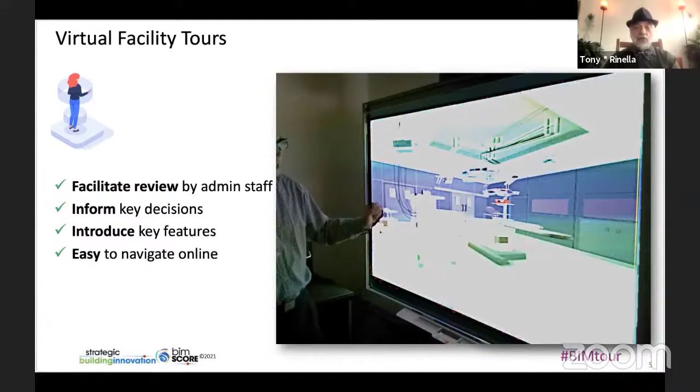Some of the things that people immediately think of are, oh, I can put on 3D glasses and I can see a wonderful walkthrough of my facility. And this is very useful to educate staff, to inform decisions. It can help us introduce key features of a facility to the people who will dwell in it, and also for our leasing efforts. But there are other things we can do as well.

Because the information is stored digitally and in a rational format, which is understandable by many systems, we can do all sorts of analysis to optimize the value we receive from these facilities. And those can be in terms of making sure that the facilities are comfortable, making sure that they're functional, making sure that we use the space well, and making sure that we support workers or residents who are inside the building.

We can also use these tools to help us with preventative and predictive maintenance so that we can understand what tasks need to be done to keep all the systems in the facility functioning well. We can also use this to track our requests for service, our trouble tickets, so that we can see an overall view of what's happening with our facility at any moment, and organize many facilities so that we can better manage the labor force.

We can also use it to help the people who are going to service the equipment, either for scheduled maintenance or to handle an emergency that arises, so that they can immediately, before they go into the situation, get a visualization of what the equipment looks like. They can see where it is in relation to other portions of the building, and they can use their handheld tools or some other visualization to quickly get all the information they need about the piece of equipment to help them service it more quickly.

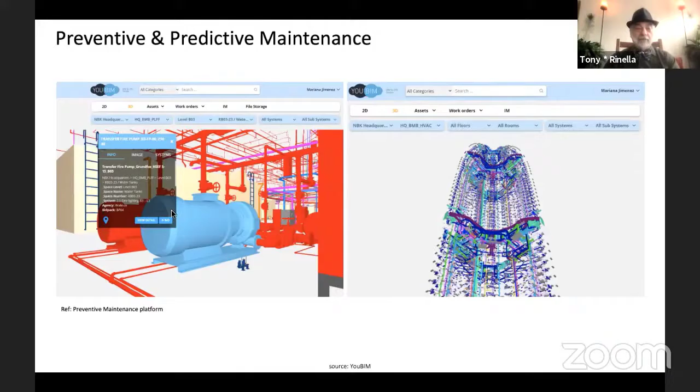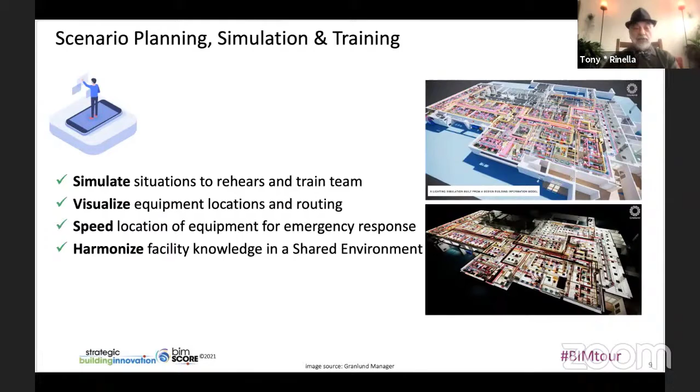It's also possible to do scenario planning and simulation. Scenarios can be as simple as, how do we show people how to exit a building in the case of an emergency? Or if we're doing renovations, how will we experience the building as the renovations take place and certain portions of the building are under construction.

We can also use these tools, the BIM tools connected with Internet of Things for our systems and services, to begin to understand how we're using energy, water, other resources, and not only see what we're doing in this moment, but based on analysis of the patterns of use, to be able to predict what we will need in the future.

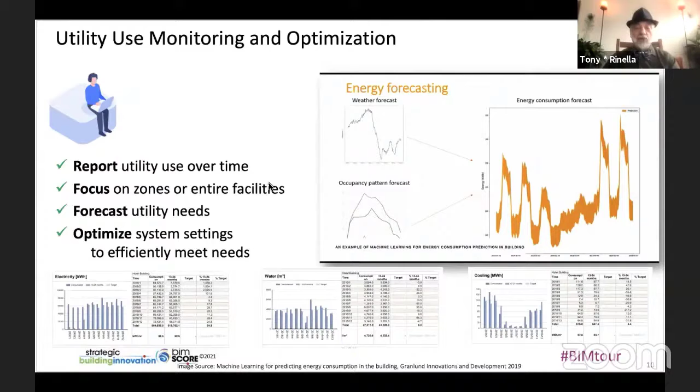This can be extremely useful, for example, if there are seasons of the year or parts of the day when we have a high cooling need, and we can understand how to purchase our energy or perhaps buffer and store our energy so that we can accommodate these spikes in need without having to go to more expensive resources. Also very useful for those who are concerned with green energy so that they can assure themselves that their storage capacity will meet their peak need.

Perhaps most importantly, these digital systems give us the ability to integrate reporting from all these various aspects so that at an executive level, we can get a very quick dashboard view and a look to see, is this building functioning the way we anticipated, the way we planned, the way we budgeted, or is something going better than expected or worse than expected, in which case we can take intervention.

So once we know all of these things, we can then begin to understand what our use cases will be. That is how we will use BIM. We can understand what information we will need to support these uses, and therefore what information needs to be in the asset information model, the BIM, and we can then inform the creation of that asset information model, the BIM.

This model can have many different kinds of information. It can have the geometry, so we know what things look like. It can have the data, so we know what things are. And it can have other related documents, for example, warranty information or maintenance information, so that we understand how to care for the systems in our building. And then anyone can get a quick report to get the highlights of this information, or they can look at more detailed documentation.

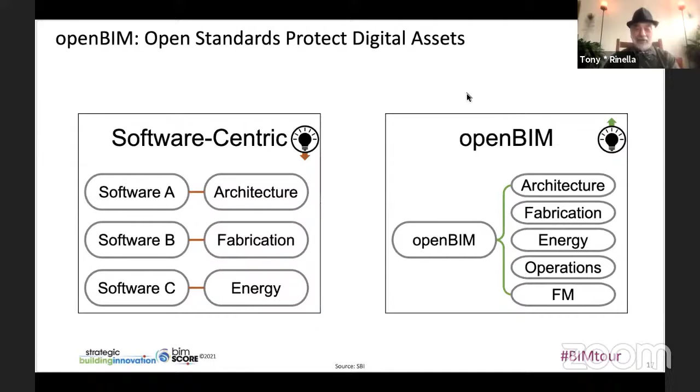Whereas if we use an open standard, such as openBIM, which you can find at buildingSMART International, then all of these different functions can speak the same language. Those of you who may be struggling with my English right now will have sympathy for how important it is to have all of our systems speak a common language.

Then we have to develop a plan to collect the data for the facility. It is very unlikely, especially for a large facility owner or an owner of many facilities, that they can, in one moment, gather all the information they need. It's important to do planning and follow that with implementation. The planning will look at the business requirements, such as those we've just spoken of. They'll want to develop a vision with objectives, that is, what will they accomplish, and targeting, which is what is the measure of success.

If, for example, we say that we want to occupy our buildings, that's a good objective, but we need to measure what success in that category means. Are we looking for 100% occupancy, 98% occupancy, 80% occupancy? What is necessary in order to achieve our financial goals? And then a strategic roadmap to accomplish these things.

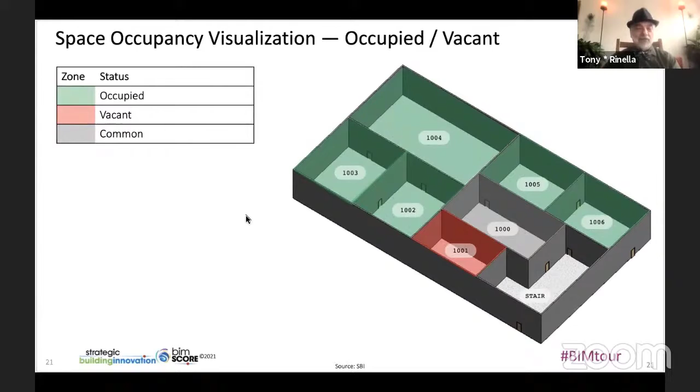For rental chargeback, it's important to know for each of these rooms who's actually occupying the room. And in this case, we can see different departments of our organization are occupying different spaces. Commercial banking, for example, is occupying these three portions of this particular floor. Granted, this is a tiny toy example. The real examples from large facilities are too difficult to read. It gets all too small.

With this, because we know the spaces they're occupying, the building information model can quickly calculate the area. It can understand the common areas, such as the lobby. It can understand areas which are typically allocated in a different way, such as the stairway. It can automatically compute the space that they're using in the facility and be able to apply the rental rate and give them the charge back.

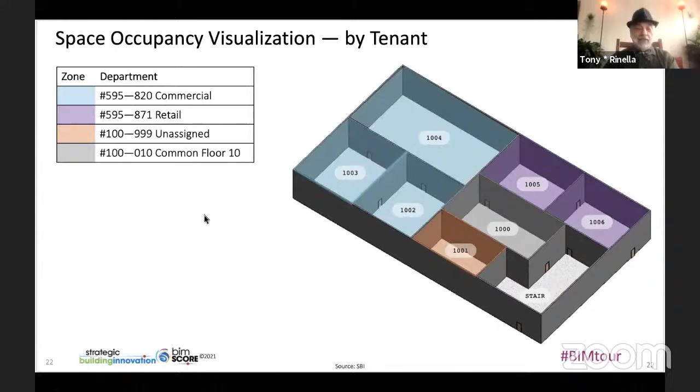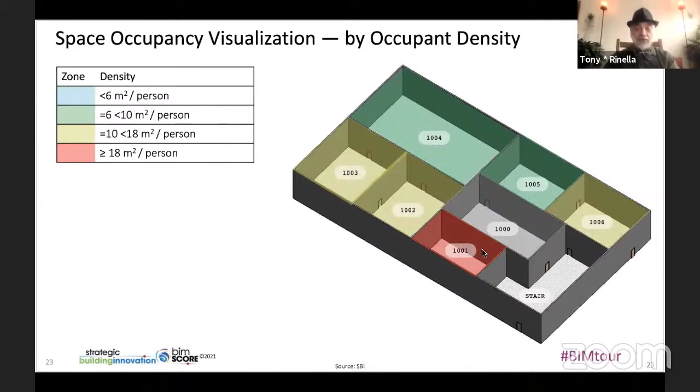We can also look at other kinds of utilization. For example, the density. This particular organization has standards that they would like to follow of between 6 and 10 square meters per person for average staff, and a little bit more space for executives and people who require private offices. Because the building information model knows the occupancy and can very quickly calculate the area of these spaces, it can give a visual report to say, oh, this room 1001 is not being used effectively. There are more than 18 square meters per person in this space. So that helps us to understand how the space is being used.

In this case, the occupancy information, which comes from tables that are arrived at either by survey or by having elements of the organization, departments in the organization, claim space or request space so that we know where they are, and the asset information model, the BIM, which knows the physicality of the space, together can go into a system that understands what's being occupied by whom and can calculate the rent, and then through a piece of middleware can actually impact the general ledger. That's a system we set up for one of our clients.

In order for these systems to work, they need to be absolutely up to date and reliable. And because of this, the owner, after having established the requirements, needs to give those to the supply chain. In the case of building a building or doing renovations, those will be builders and design consultants. In the case of doing facility inventory, they may be consultants who are specifically in the business of looking at an existing facility and creating a model.

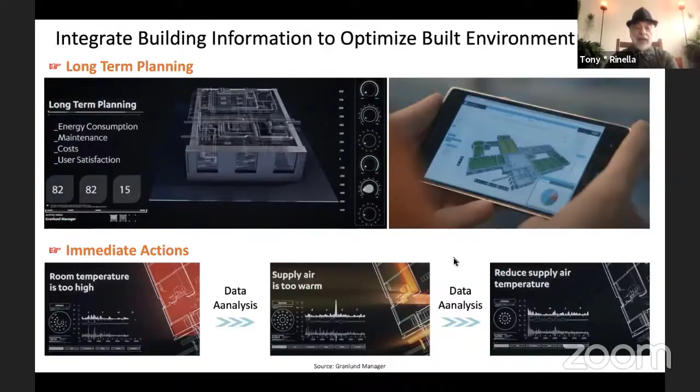So in summary, it's important to understand your business objectives and your operational efficiency objectives, and then to think about BIM, both in terms of long-term planning, how we can do things like scenario management and understand facility use, and in terms of immediate action, such as finding we have a problem and being able to inform the people who will solve that problem to very quickly have the information they need and resolve the problem.

You've seen a number of images in this presentation and some case study examples. We've provided this information about the sources for those, so you can check back. This is not to endorse any specific company or product or tool, but rather just to let you know where we found the information that we've shared today.

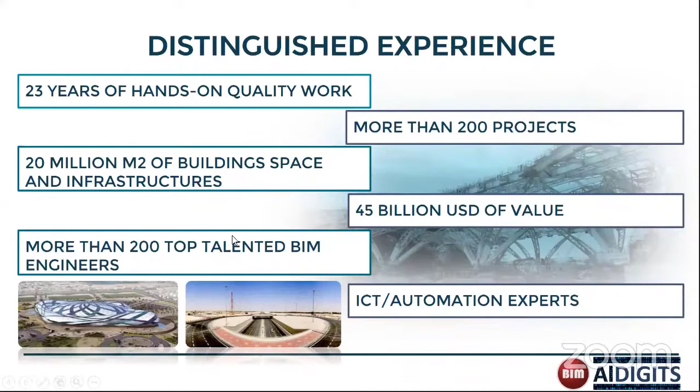So if you want to do a really effective utilization of this technology, you need to look seriously at integration between the different applications, the different functions, the different systems and the different people in an organization or in a project. And this is the philosophy and the heart of our operation.

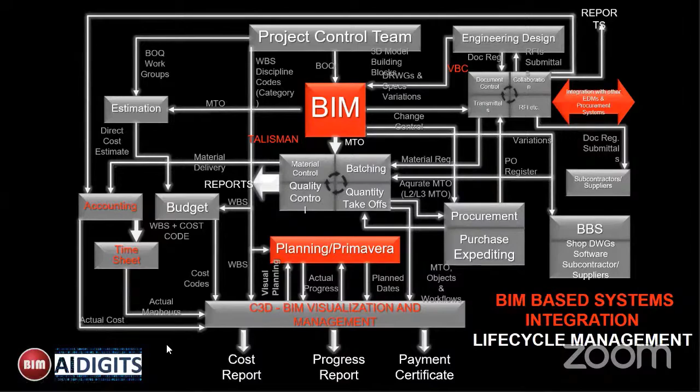Interoperability and data exchange between clients, stakeholders, and partners in any system or project require a serious look. That's why we developed what we call the electronic data interface, which is the start of any relation between us and others, or between partners working in this technology around information exchange and management.

The third fundamental for our operation is scope management. If you want to do anything properly, you need to understand how to quantify and measure it, whether it's a space, an area, material to be bought, equipment to be utilized, or resources to be deployed. Once you know the scope well, you can plan it well, and you can control the operation of that facility or asset.

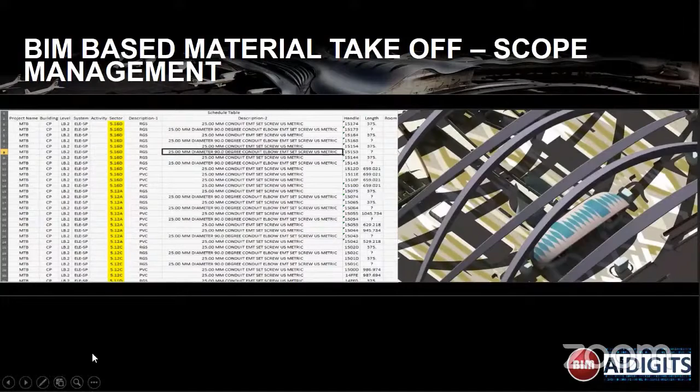The fourth basic fundamental is how to name assets. To work with objects, these objects must have a unique identifier, what we call an asset tag. This tag needs to be maintained through every phase: design, construction, post-construction, handing over, facility management, operation and maintenance, even integrating with GIS and IoT. All information for that asset needs to be hosted in a central, integrated data repository, carrying the shape, functional characteristics, physical characteristics, and documents relevant for that asset in one system. This is one of the basic fundamental ways we work and operate in the BIM field.

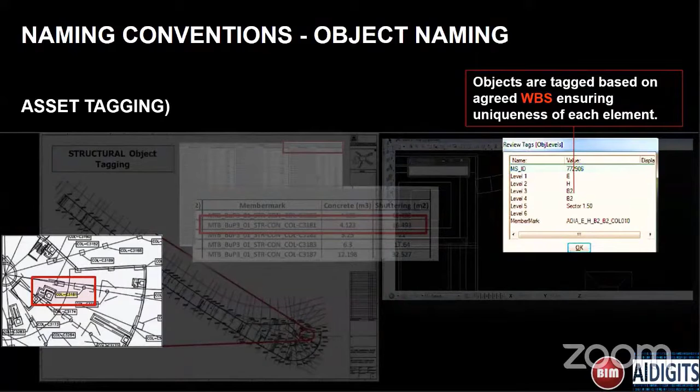Last but not least, it's very important to capture information. You need to structure it, save it, and then disseminate it, sharing it with other stakeholders, suppliers, and partners. So collaboration and data sharing is fundamental in our work, and workflow management is also important to our business.

Now let's talk about the relation between the banking sector and construction business. There is so much dependence of the construction sector on the banking business. All the supply chain of projects, whether a main contractor, supplier, subcontractor, or logistics, takes facilities from banks and utilizes bank facilities in their operation. So there is huge dependence of the construction industry on the banking sector, and the other way around. This is one important synergy where the banking system and the construction sector overlap.

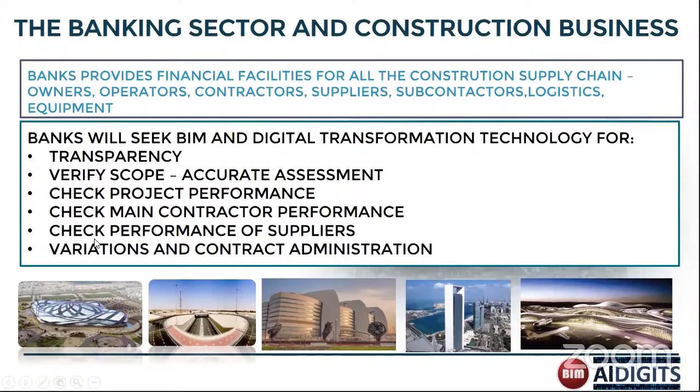What you see in front of you is an example of how BIM can give a very good standing of the position of the construction process, and how the different interfaces between the different participants in a project can be captured in a BIM model. The relation between the financing sector and the banks can also be depicted virtually, and a BIM system can check the payment certificate, check the progress of a project, and as such the bank can also have a look at the performance of the project.

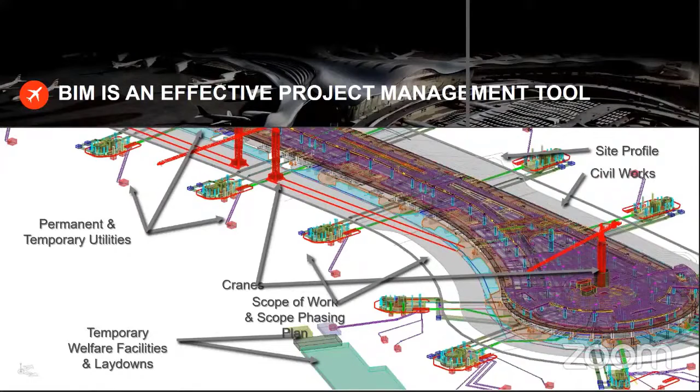Now, when we talk about banks being owners for projects, the bank is not looking only at the performance of the project. It is looking to ensure that the facility is going to be delivered on time, with the correct quality, according to the specifications. He also needs to control the cost and the budget, making sure the budget is maintained and that, as much as possible, he can make less expenditure for that facility. In the construction business, BIM has proven very effective as a project management tool.

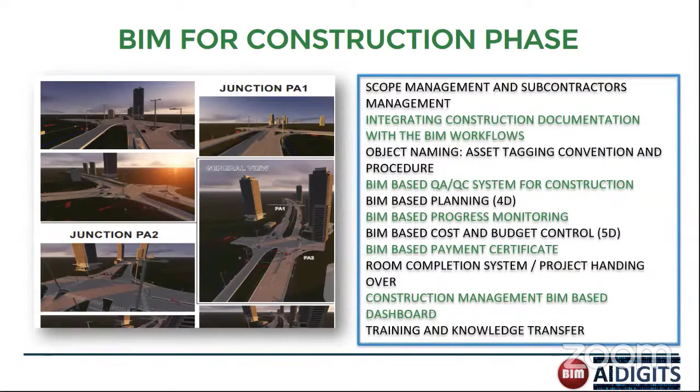There are many functions of project management, including planning, time management, progress monitoring, quality control, cost management, and payment certificates, creating a dashboard where the bank can refer to and check the performance of his facility: if the designer has finished his work or not, if the contractor has finished his work properly or not, if the payment due is credible or not. All this can be extracted for the bank as an owner of a project he is owning or executing, to achieve a certain target.

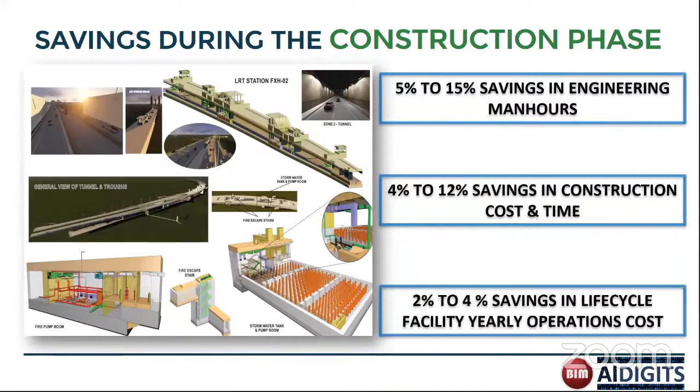From our experience, we have realized important benefits for the construction industry when BIM is well positioned and executed through all the supply chain of the construction process. There is great saving that can be achieved, and the owner of the facility can get a huge return if he invests early enough in having a complete and comprehensive platform that drives the construction process digitally, creating a digital transformation platform where he can execute, see, and follow the construction operations from A to Z.

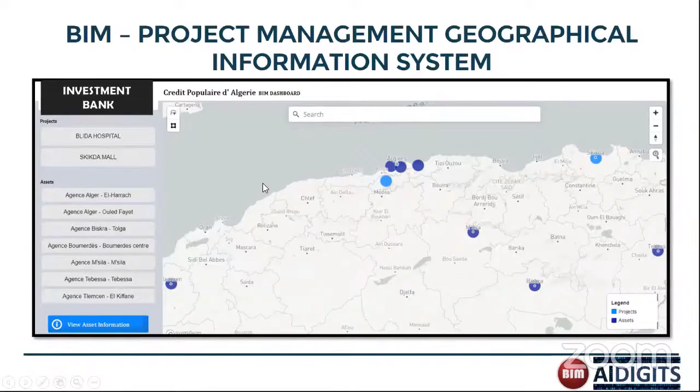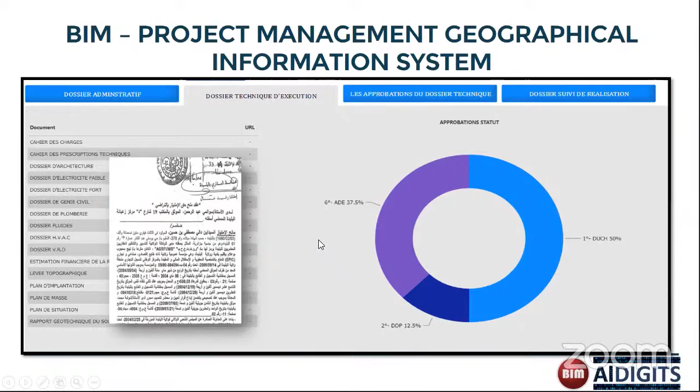This is an example from one of our projects, where one of the banks has two huge projects. You can see a map of the locations of the projects, and also a map of the location of his branches. We'll talk about the branches later, but now we are focusing on the project dashboard. The bank can check the status of permits, the status of documentation, the design, and the percentage progress of procurement through the dashboard for each and every project.

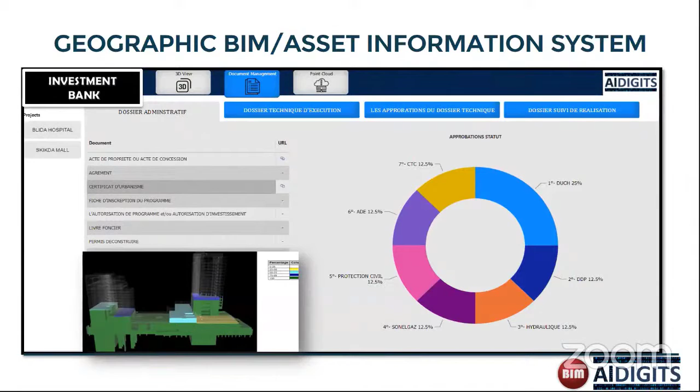He can also witness visually each and every project and its progress in a BIM environment, shown in a colored way, so he knows, for example, green is executed, gray is under construction, or blue is 25% progress.

When banks have a lot of assets, buildings, facilities, inside each and every building or facility there are tremendous amounts of assets: chairs, furniture, equipment, mechanical assets, electrical assets. It is very important for the bank to be able to witness and see all these assets in a huge database connected to analysis and big data platforms, where it can make good projections of the performance of its total portfolio of assets, how much it's spending for maintenance, operations, preventive maintenance, and repairs. So it gets a holistic view about the performance of its assets, in a certain branch or in all the branches.

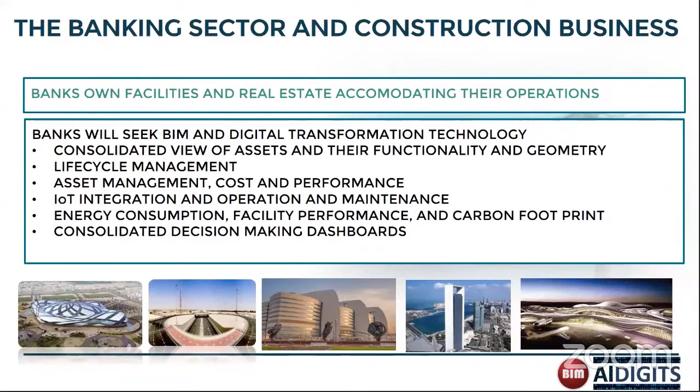He can also get deeper using this technology by integrating the assets with IoT sensors, so he can have an as-built digital twin of the asset, and also a dynamic view of the performance of each and every asset through the sensors connected to it. So he gets an as-built condition and performance dynamic database, so he can check the performance of the assets of a certain branch or of the whole portfolio of assets he has.

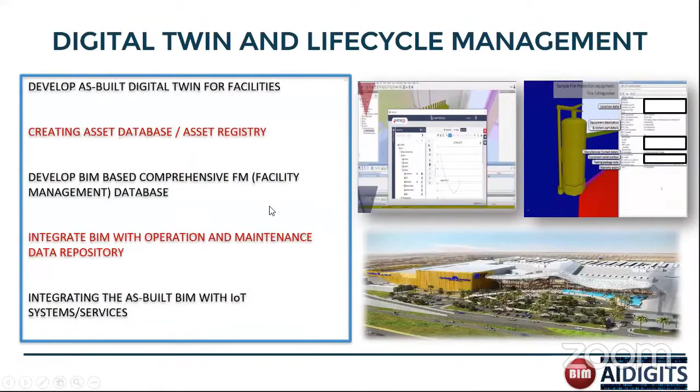And definitely during the operation and maintenance phase, he can achieve through that integration tremendous amount of return and benefits. And I would like to take you to a couple of dashboards that we have developed for banks, where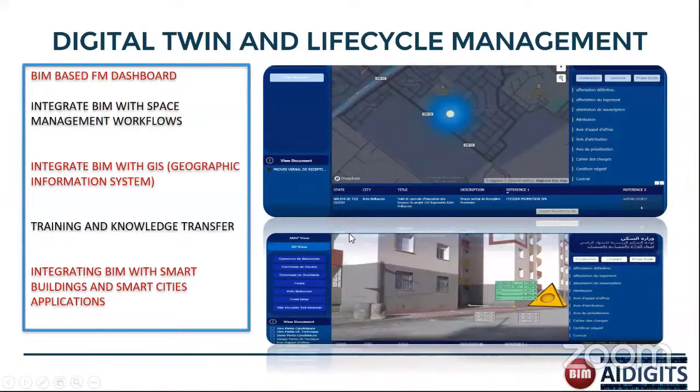they can witness the performance of certain assets. For example, they can go to the dashboard, select a certain branch, and then go specifically to that branch and check the price of that asset, the performance of that asset, when it was last maintained, what was the cost of maintenance, when is the next schedule to be maintained, and then they can do a comprehensive cost or maintenance cost for the whole branch, or maybe at the end of the year for all the branches together.

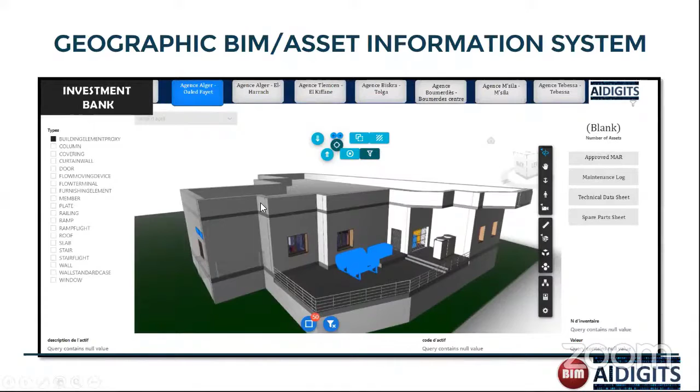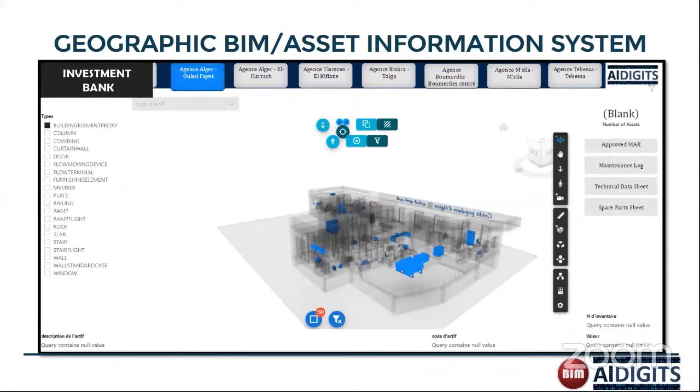As you can see, you can do a lot of filtering and manipulation of data. Those are all live data. And this is really an example from an existing use case for one of the banks in Africa.

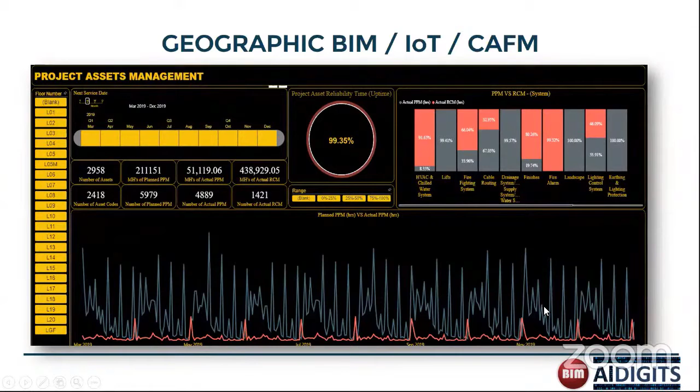And as I said, you can integrate this with IoT systems, and for one of our clients we have integrated 26 different IoT systems with our dashboard, with our central BIM data repository. So you can see a 3D model for each and every asset. You can check the temperature, the performance, the quality of air in that room, the presence of persons in that room, and you can have an integrated view for all the branches at the hands of the top management or executives, where they can make good decisions about the performance of the building or the performance of the whole assets or portfolio of assets of the bank.

Last but not least, I would like to talk about banks and their support for innovation, sustainability, green buildings, and circular economy. As you know, BIM is a huge asset in that, because it captures all the functional characteristics of a facility with all its components. So a tremendous amount of studies can be done. Designs can be enhanced to make building performance more green friendly, more environment friendly, reduce the carbon footprint, and enhance the performance of buildings in general.

And I believe all these technologies, banks are interested to invest in, whether it is for their own facilities or for the facilities they are financing. This is an example of very unique, innovative ideas where you can integrate BIM with manufacturing, creating a very robust and effective way of making the manufacturing process very smart and more cost effective. And this is some areas where banks would like to invest with manufacturers and factories, so the bank will invest in innovation and manufacturers will receive the value as well as the banks. It's just an example for demonstration.

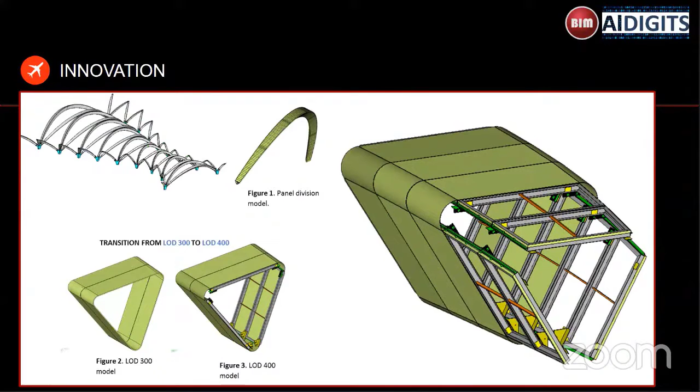And of course, we have utilized BIM very well for sustainability studies in many projects. That's why I'm emphasizing the importance of banks investing in sustainability initiatives for integrating BIM with sustainability. This can be very fruitful for the supply chain of the construction industry and also for the banking sector.

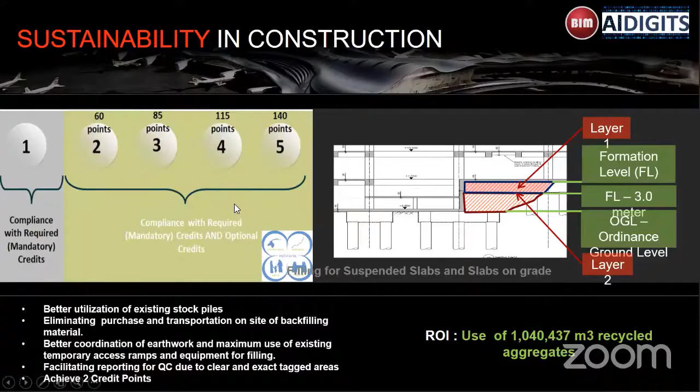And this is felt in all the projects that we worked with all our clients. And I believe it is a very good investment for banks to look in educating the supply chain on digital transformation and building information modeling.